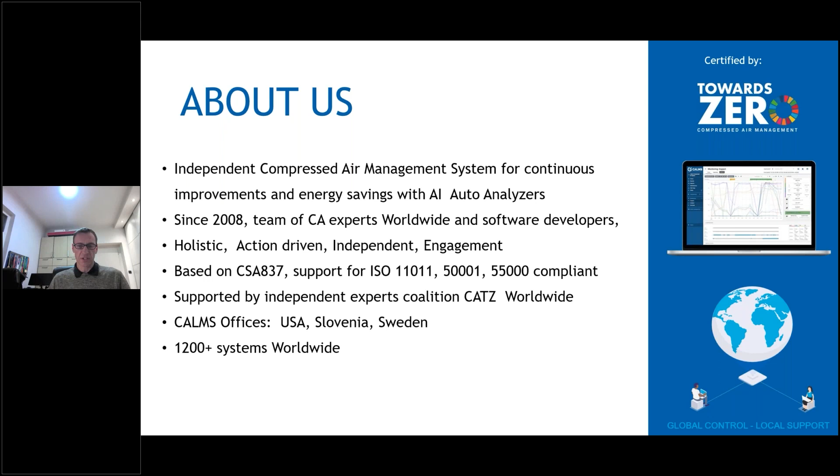So a little bit about myself. I have worked for over 30 years with compressed air. I'm the team leader of CALMS. We are independent, let's say, compressed air enthusiasts, working since 2008 as compressed air experts and software developers for 15 years, trying to create an independent global management software platform with a holistic approach, action-driven, and with the engagement of all users in this process. We have offices in the US, Slovenia, and Sweden, and cover more than 1,200 systems worldwide.

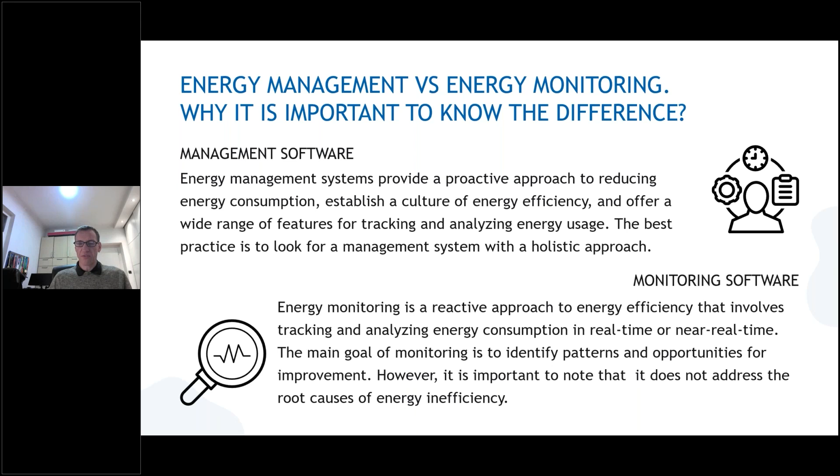So the first important thing is to differentiate between management and monitoring. An energy management system is a little bit higher, includes also the monitoring part, and it is a proactive approach. We also use a holistic approach, so everything is included, from asset management, assessment, system review, audits, permanent monitoring, everything focused on finding the opportunities with the savings action cards. With monitoring, we are just trending, collecting data, analyzing data, but we don't address the real root cause of energy inefficiency. So actually you need an expert to help you verify and analyze the data further.

So compressed air management should include data acquisition, monitoring, collecting data. It will provide energy analytics and insights into the data. It will give you tools for energy optimization, simulations, events tracking, carbon tracking, before-after events, cost management, purchasing management, and asset management. So on the right side, you can see a lot of detailed elements which are part of every compressed air management system.

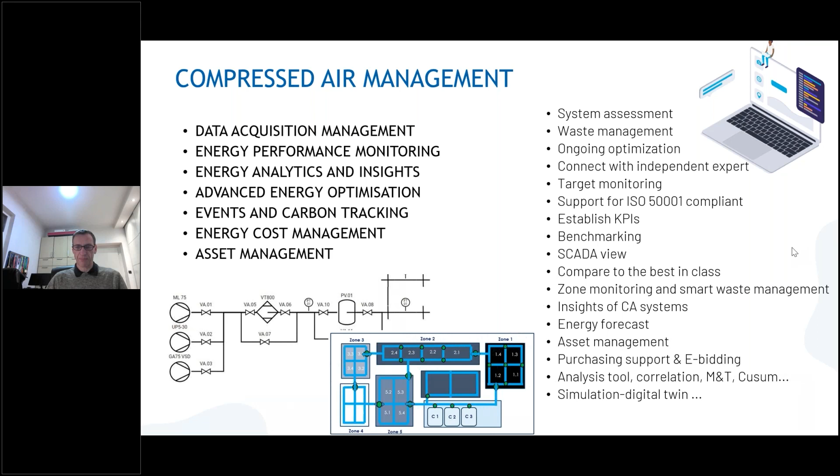So why are we using auto analyzers and artificial intelligence, and how do we incorporate this into the auto analyzers? When we are collecting data, we are talking about big data. We are collecting data with a sample rate of 1 second, 5 seconds. This means that for one, let's say, medium compressed air system, we are measuring about 20 to 30 channels, and additionally we are calculating another 20 calculations.

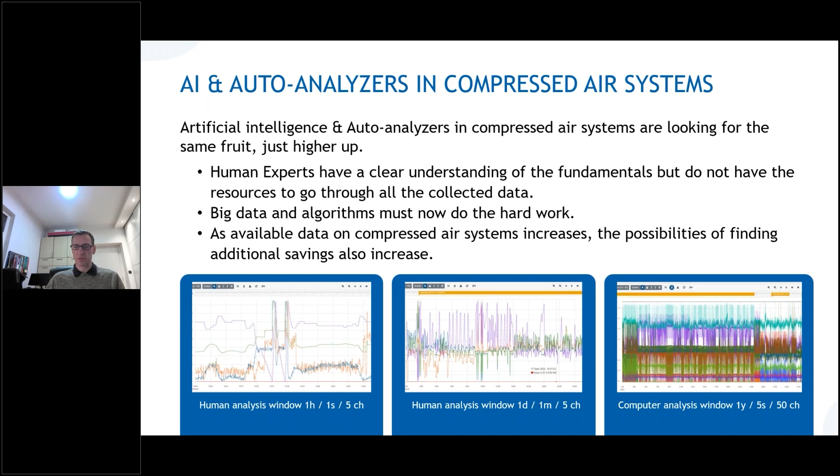So we have 50 channels, and a human cannot process more than 1 hour of such data for maximum 5 channels, on your left. On your right, you see what a computer can do. With the auto analyzers, they can analyze 1 year of data, 5-second sample rate, more than 50 channels, and give you opportunity cards. You can focus with the experts on detailed analysis of this data. So below you can see, today I will focus on air quality.

Last week I was at one of our customers, a copper mine, working as an auditor. After 1 year, they started repairing the piping. It's a big copper mine, so they're using big centrifugal compressors. The intake air is very dusty. So this dust is coming, even if they have absolute filters, to the impeller side, to the intake of the compressor, which you see is dirty. And this goes then to the air dryers and further with the old piping to the system.

When they cut the pipes, they found a lot of dirt inside. So during the audit we were measuring dew point, temperature, flow, and pressure drop over the dryers. Those are the typical measurements that we do when we track air quality.

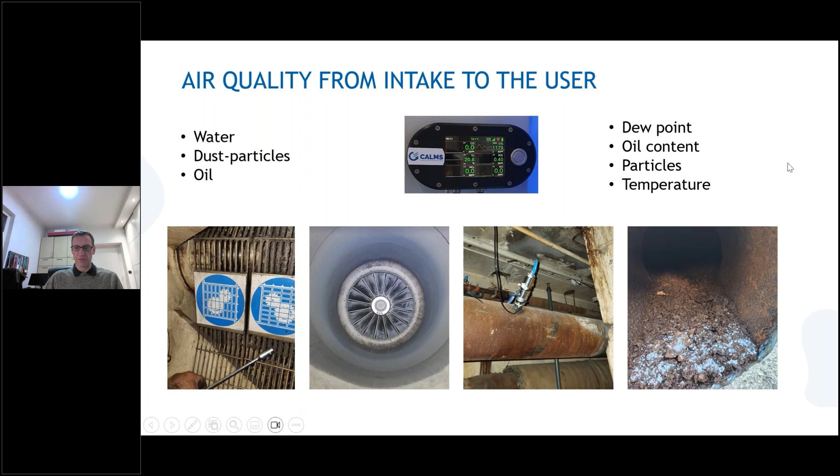When we collect all this data with the sensors in the factories in different parts, the process is with the edge devices or loggers. We collect those data. We transmit this data immediately through 3G or 4G or 5G as a data stream to the servers. So that is the meaning of remote, where we have the auto analyzers charting.

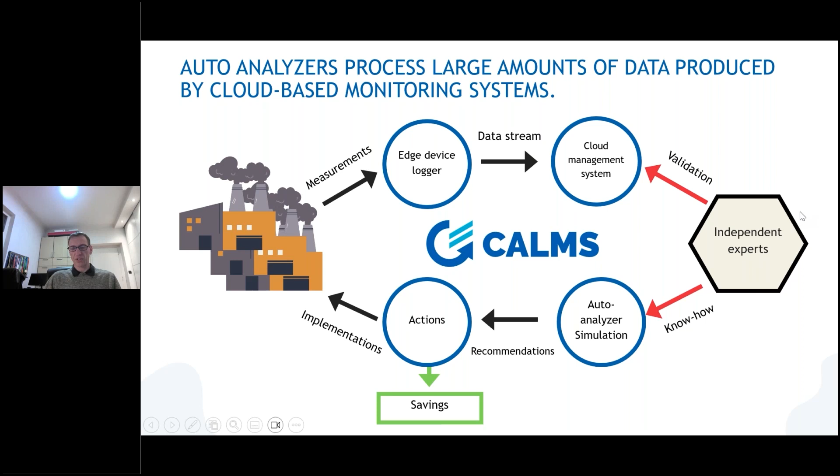And together with the help of independent experts, we can validate those data, we can analyze the charts, and also independent experts can also help with their knowledge to create new auto analyzers, to do the simulations, find the best actions, and then the actions are giving us the savings, which are actually needed in the end solution of the management.

This is a little bit detailed process where we have a compressed air system with the compressors, where we always measure the electrical input power. We measure on a wet side pressure, sometimes the temperature, then we have air treatment. And after the air treatment downstream, we measure dew point, pressure, temperature, and flow. So those are the most important measurements that we do with remote monitoring.

Those data are collected from different factories, different zones. Also the waste management through the assessment, they are collected in the servers. With the auto analyzers, we can have different views: multi-site view for KPI, benchmarking, comparing different systems based on isentropic efficiency. And then we have a plant single system view, like a SCADA, for supervision and operation on a single plant.

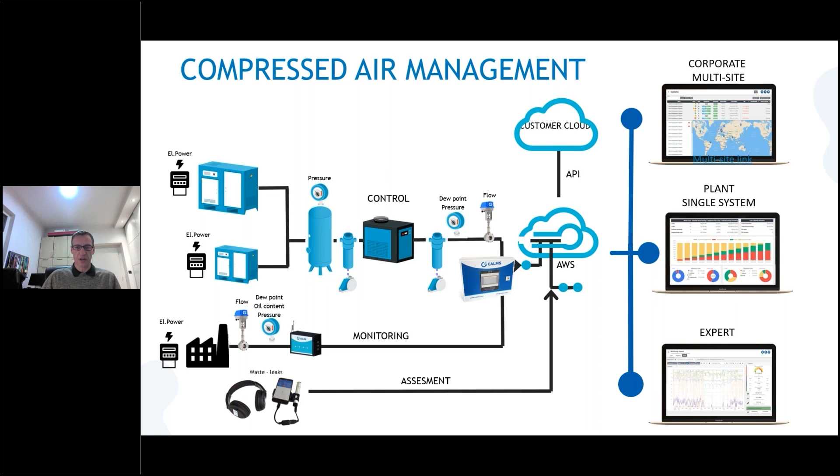And then we have an expert view with all the tools needed for compressed air experts to validate, analyze, simulate using M&T diagrams, CUSUM diagrams, and all the correlation tools for analyzing the data. This is the complete process for compressed air management.

And the results out of this compressed air management, out of these auto analyzers, are opportunity cards. We are collecting opportunity cards automatically. They are created in 5 different segments. The first one is coming from system assessment, which can be a system review or pre-audit or waste survey. Then we have the cards that are coming out of training, which is a very important part. When you do the training, you get the questions and also pop up the cards.

Then we have audit, energy audit, where an expert is, based on the measurements, creating the cards with the savings opportunity. We have the permanent ongoing monitoring, the fourth stage, and the last one is the asset management, where we collect all the cards. And for example, this is change dryer type.

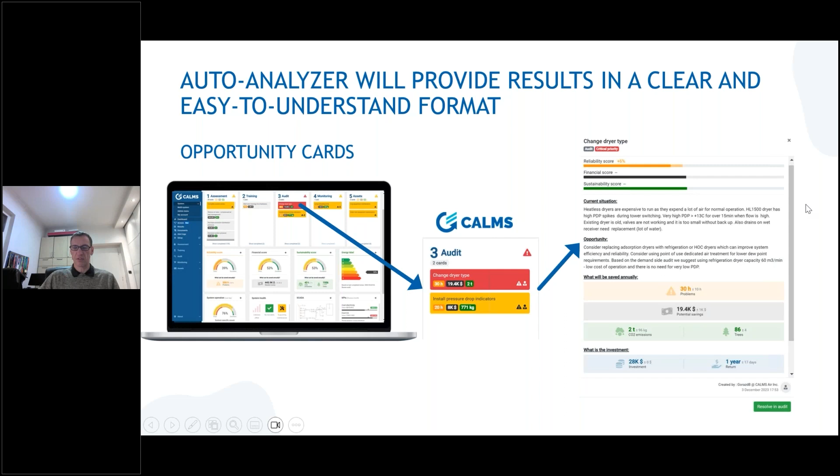And the card will actually give you the solution what to do in the compressed air to make it work better. It will be equipped with reliability score, number of hours of potential problems. This is based on AI algorithms. It's calculated in a lot of systems, and we are training this model continuously. Then we have financial score, how much savings in dollars you can get in your system, and sustainability score, how much CO2 you are actually saving if you do this opportunity card action.

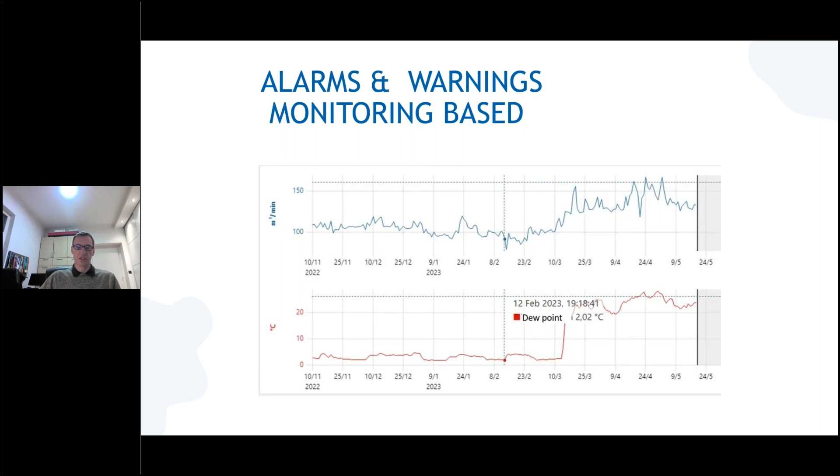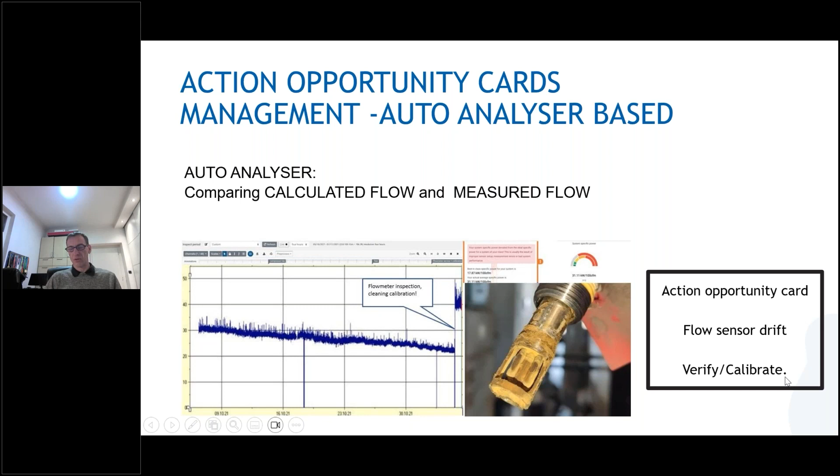Verify, calibrate, clean, or do some other inspection. So this is some example of this. We can use tools like correlation tools together with auto analyzers to go a little bit deeper. For example, in this case, we were measuring dew points in 2 different locations, and we were not able to find out the root cause for the problem of a high dew point at point number 1.

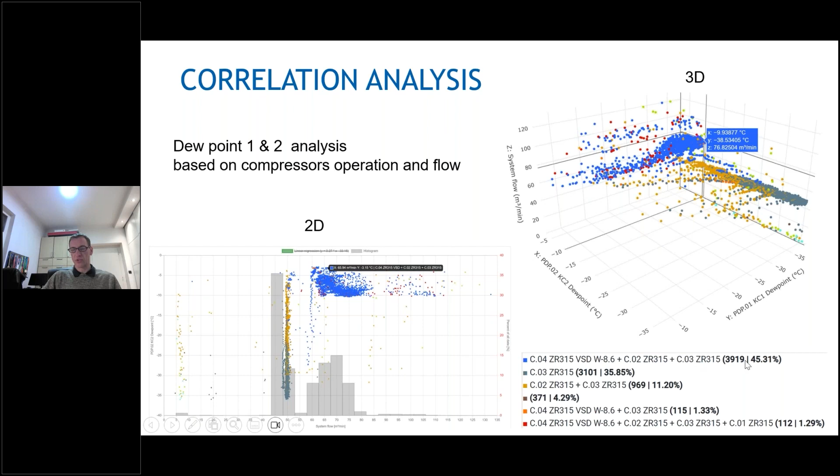And with these 2D charts, correlation charts, we actually see a different combination of the compressors, like the blue one, which has a very high dew point, but we didn't know when this happened. And in the 3D chart, we were using 2 different dew points together with the system flow and the combination of different compressors, and we were able to see exactly where that combination is coming from, related also to the flow and one of the compressors which is operating 45% of the time.

The last part, okay, just skip it, is actually maintenance and total cost of ownership, which is a very important part of complete compressed air management. With the maintenance logs, we should not log only the compressor service intervals, but also dryers, filters, instrumentation, receivers. Everything should be tracked and logged for servicing, because service is a very important part.

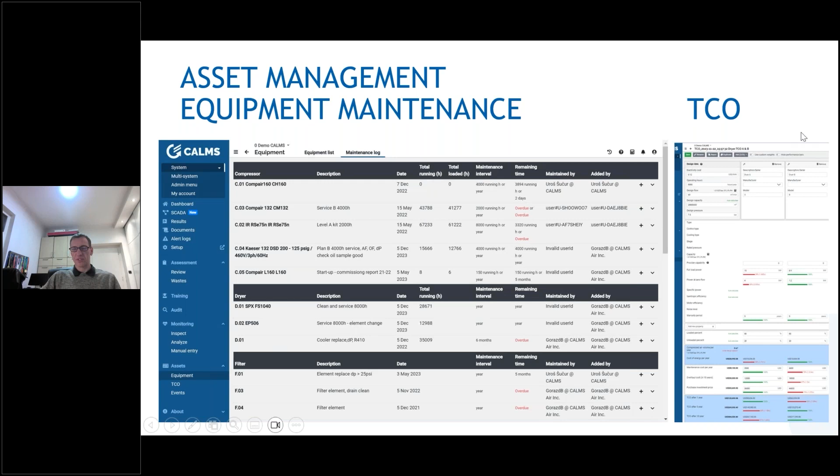And the total cost of ownership is the next element, which is very important for complete management. It calculates the cost of your compressed air, your dryers, filters over 1 year, 5 years, or 10 years. So this is everything as a complete compressed air management.